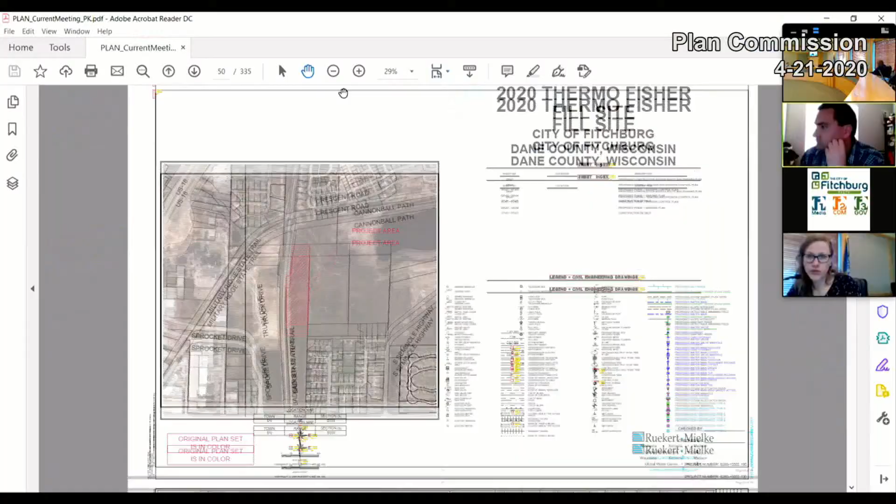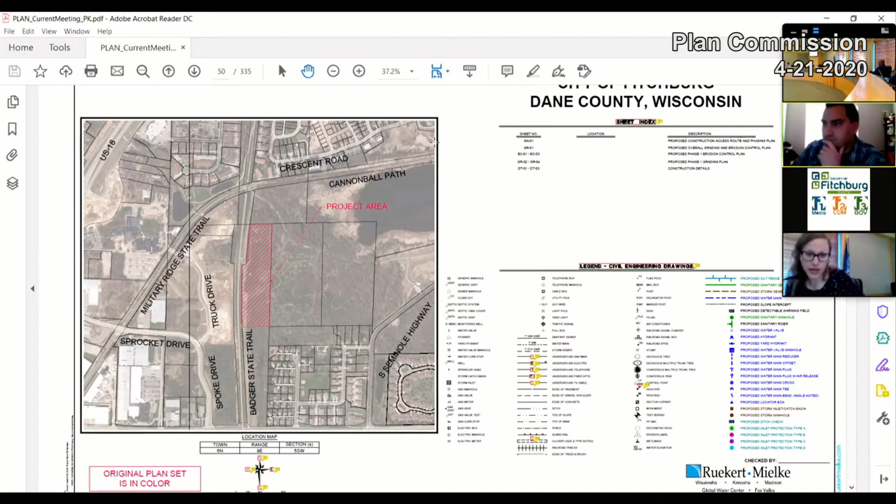All right, so this application is for an erosion control permit or a land disturbing activity. When the parcel is over 5 acres in size, this requires Plan Commission approval, so that's why it's before you tonight. The parcel is located north of McKee Road.

It's in between the Badger State Trail and the Dolly Park Conservancy area. Shown up here on the image, it's this long and narrow outlot that goes parallel here to the Badger State Trail. The parcel itself is about 18 acres in size, and the area of land disturbance is outlined in the red hatching on the northern portion of the parcel. That encompasses about 11 acres of the outlot.

To the south here, we have the Pine Ridge Subdivision, and over to the west are the rest of the Thermo Fisher land holdings, Spoke and Sprocket Drive, and again, the convergence of the bike paths in this area and the Pond and Dolly Park Conservancy over here to the east.

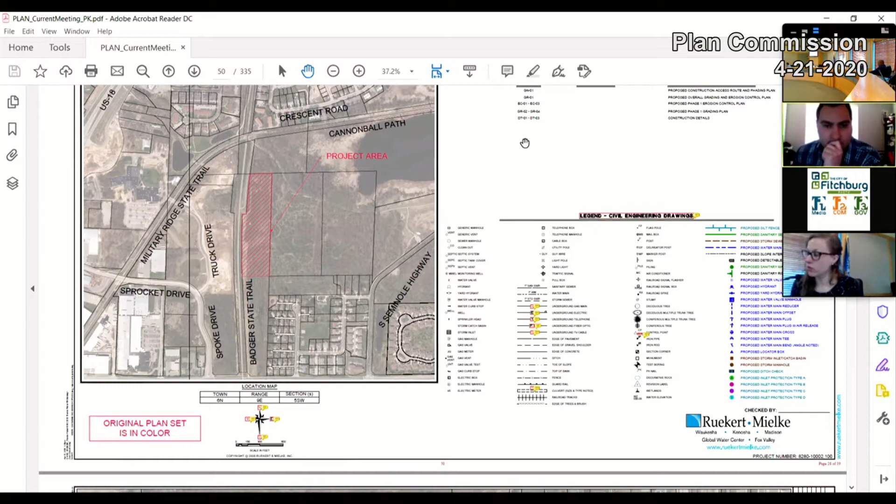A lot of neighborhood residents submitted some comments of concern that touched on different topics, so I just want to run through those quickly. They were about the topics of noise, traffic, aesthetics, and how the sort of stabilization and slopes and grades would look after the fill is complete, stormwater, hours of operation, overnight crushing, and things like that.

And before I go into all of those comments, I'll also show this phasing plan. In total, the fill to be brought into this site would amount to 100,000 cubic yards of fill. It would be coming from two different City of Fitchburg road construction projects: first, the McKee Road reconstruction, and then second, the Fish Hatchery Road reconstruction.

Phase 1 and 2 would happen on the farthest north end of the parcel, amounting to approximately 30 to 40,000 cubic yards for each phase. Phase 1 and 2 would come from the McKee Road project, and Phase 3 would come from the Fish Hatchery Road project.

Going through those issues: first, the hours of operation. The applicant stated no overnight work would be done, and work would be limited to standard city construction hours. In the staff recommendation for approval, we've limited that by saying construction may not occur outside of 7 a.m. to 6 p.m.

Second, because hours would not extend beyond 6 p.m., the applicant has stated that lighting would not be required. We've also limited the approval accordingly, with site lighting being prohibited on site.

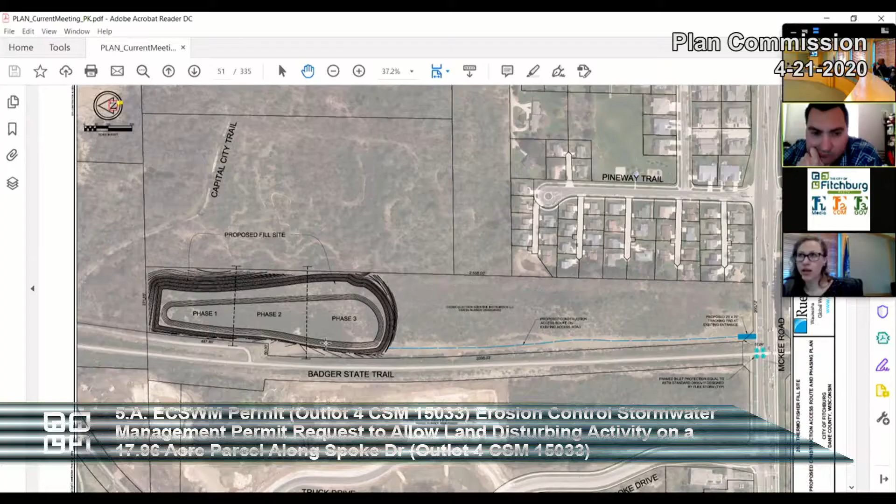Third, we provided review comments to the applicant regarding the impact on the bike path aesthetically. In their response, they explained that the first 40 feet east of the Badger State Trail would not be disturbed. After that, the grade would start to go up, forming an embankment of about 8 to 10 feet in height, not exceeding a slope of 3 to 1.

That area would be seeded with native prairie grass. Regarding compaction, we wanted to make sure the fill being brought in would be appropriate for future development. The application proposes an agreement with the landowner, Thermo Fisher, that the fill would be limited to soil, sand, and rock, precluding construction waste as well as hydric soils. Finally, regarding stormwater, there were a lot of resident concerns.

Public Works has reviewed this in detail and has recommended approval, and they've also consulted with other agencies, Dane County, as well as the City of Madison.

There were a couple of accommodations from the applicant made to address the stormwater concern. First, they added a lot of native prairie seeding. With deeper roots, it allows for greater infiltration, reducing concern about runoff due to the removal of the trees. Second, they added some temporary erosion control measures, including a basin.

I don't know exactly where it is here on the site, but if we have questions, maybe the applicant can get into that. It also reviewed specifically the drainage patterns.

Like the applicant stated, the existing pattern goes east to the park where it eventually discharges. In the proposed and final grading outcome, the flow would still continue to go to the east. In areas with the new western slope, it would drain to the west, but then meet a ditch where it would be conveyed around and still go to the east.

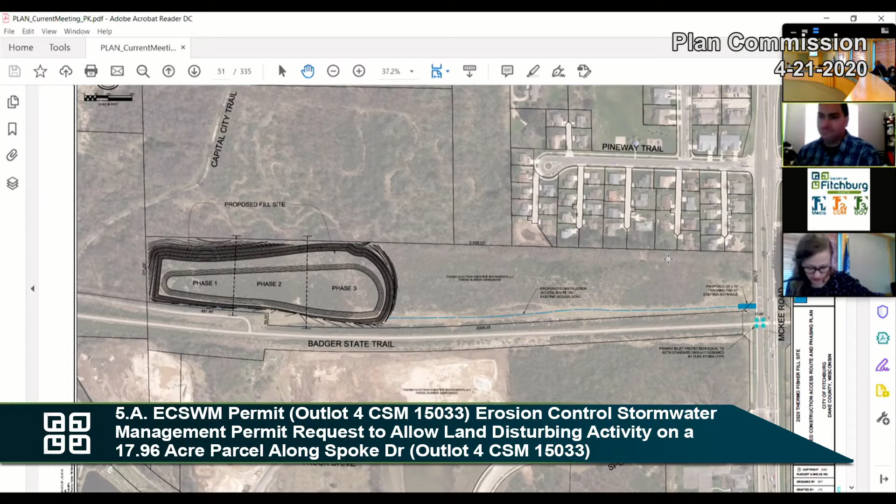All in all, the staff recommendation is for approval as listed in the staff report, and there are 7 recommended conditions that address the things we just went through.

In this area, we're also looking at the Capital City Trail and doing a study with both the City of Madison and the county as well to figure out what improvements can be done, because that area in general, nothing necessarily to do with this site, has a lot of water issues. So we're looking at ways to improve that already, and this, from what I hear, isn't going to make those things worse, but it's a bad situation.

I do have some comments from the public that I want to read before we get into discussion.

First up is from Dorothy Krause, who lives here in Fitchburg and is on the council. Dear Planning Commission members, looking over tonight's agenda, I am dismayed not to see better representation of the resident comments for your consideration. We did the Arrowhead redevelopment plan in 2012, with the largest portion being the Thermo Fisher property. The Pine Ridge neighborhood residents were heavily involved.

Knowing they would be concerned about this proposal, I asked for their thoughts when the comment form came to me. I didn't quite expect the deluge of comments that followed, more or less summed up in Matt's comments and email exchanges below. For myself, my greater concern is what happens with stormwater.

The mountain bike trails and the Capital City Trail already have stormwater issues, especially given that water from the site must cross them to get where it's going. Whatever happens, I'm hoping that the Plan Commission makes sure that guarantees are in place that will mitigate stormwater impacts for a number of years into the future as needed.

Also attached my comment sheet as well as cut and paste my comments from here. I have significant questions and concerns about stormwater impacts related to surrounding bicycle facilities in an area where there are already water issues. There is no way that this project can go forward without a stormwater study to answer many questions and concerns.

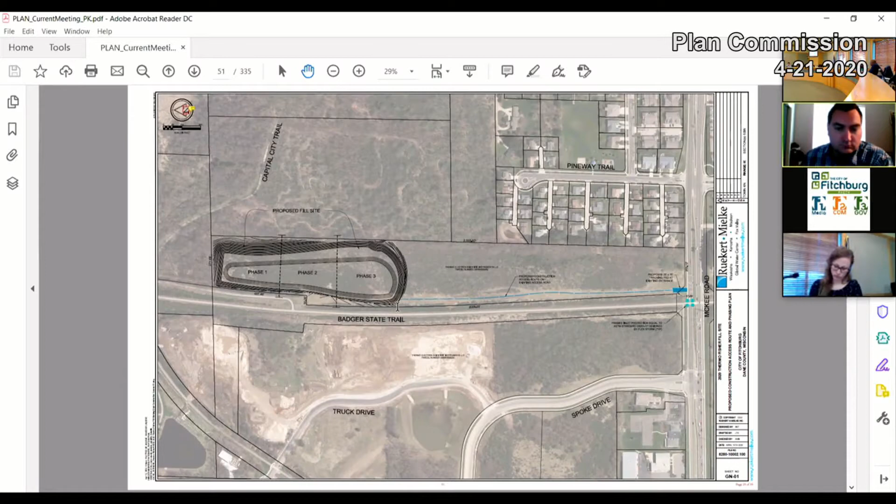I just want to make sure that the access road is coming off of McKee Road, so it'd be to the west of the Pine Ridge neighborhood, running parallel to the bike path. Is that your access point? Correct, that blue line right there is the access road back there.

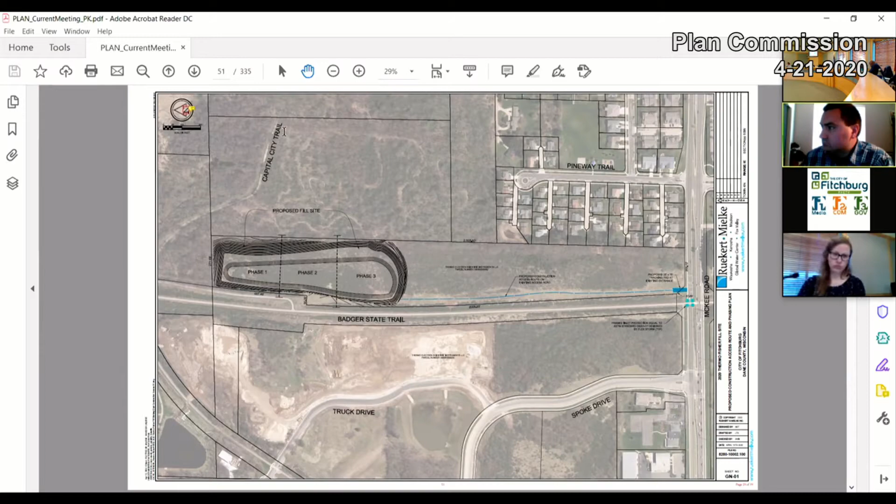And the tree line has already been cleared for that access? I believe it's been cleared at least about halfway back. I don't know if a little more clearing needs to occur, but the contractor will maintain the road and the erosion control measures as needed. And for transparency, I know they've actually started some work here with a 5-acre or less permit, because they wouldn't have to come here for that, and they need to get started.

So this is really asking for it to be, sounds like 7, not 11 acres now. Just on that point too, tree clearing did begin. So even without any fill being brought in, our public works staff noted that the tree clearing itself wouldn't require any permit or review, as long as there was no stump grubbing that would disturb the soil.

And from what I read, I believe they are doing better plantings than probably what's there right now, and agreed to do more deep-rooted plantings as well. So that's something that is going to be an improvement over what has been there. The trees we lose is unfortunate, but it's not just grass - there's some wildflowers and stuff like that too.

Do we end up just giving clearance for anything over 5, or do we actually specify up to 11? I'm curious, if we're not going to be using up to 11, should we amend this so it's appropriate for the future use? Generally, you could just make a motion stating approval is recommended as proposed. So if the proposed plans show 7 acres, then 11 acres would not be authorized unless they came back before the Plan Commission with revised plans.

Sounds like maybe you want to make a motion, Stephen. Oh yeah, Rich, I'm getting confused again, because it's a 17-acre parcel - I thought it said 11 acres of this part they were going to do, and we're actually only using 7 acres of it, is that right? Correct. Because 100,000 cubic yards is like 2.7 million cubic feet. That's a lot of dirt.

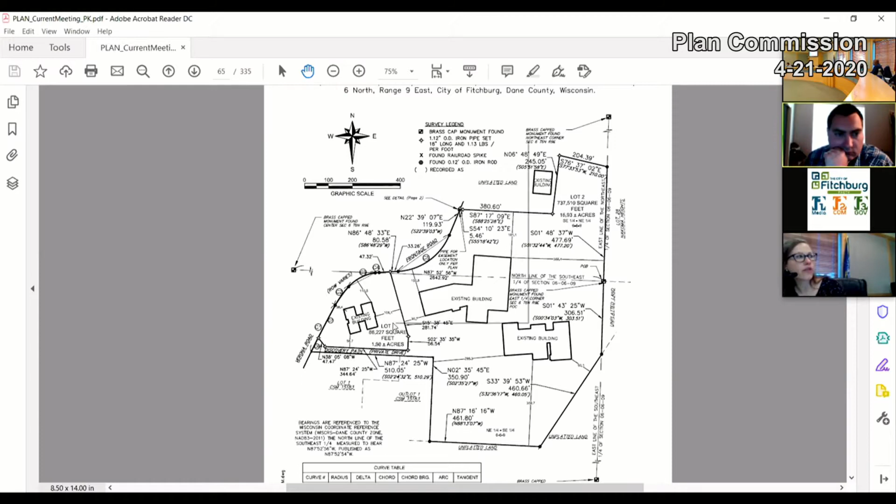The area is zoned industrial specialized. Staff identified no concerns with any of the dimensional requirements of the zoning district. Discovery Path is a private drive that provides access to Lot 1, so with the recording of this CSM, those cross-access and shared drive easements would be re-recorded. No concerns identified from Public Works staff or other departments. Staff recommendation is for approval as noted in the staff report with 7 conditions of approval.

Any questions at all? Comments? Or a motion? I'll move approval of Certified Survey Map CS 2346-20 with 7 conditions set by staff. Second. All right, all in favor, say aye. Aye. Any opposed, nay. All right, that one's approved.

Next up is conditional use permit for Park Bank. Is there someone here for Park? Are you Park Bank? Okay, do you want to come up and tell us what's going on here?

Material samples for, oh great, to go along with the architectural review for the project. Yeah, I mean, if you want to do everything right away, that's great.

My name is Brian Reed. I'm with Potter Lawson, one of the architectural team working with Park Bank on the project. Let me set these out for you. Sorry, Zach, you're not going to be able to see it very well.

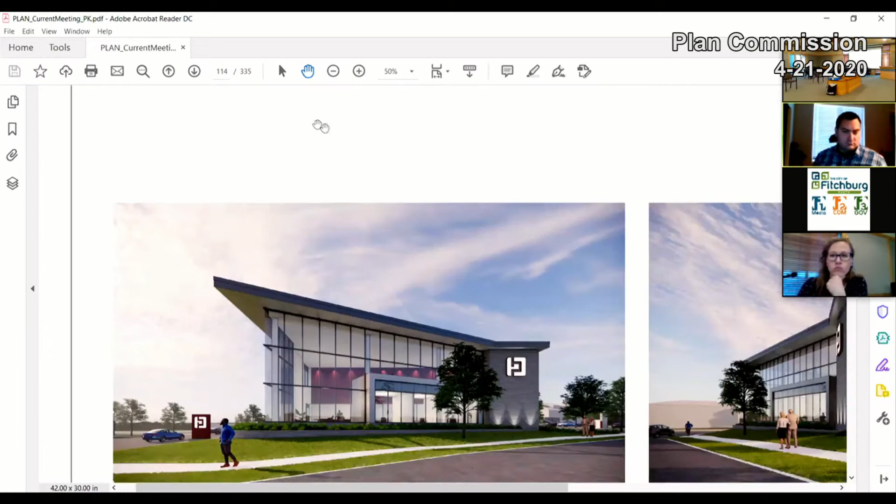The proposed exterior elevations consist of a palette of materials that are a mixture of stone masonry, curtain wall, and storefront.

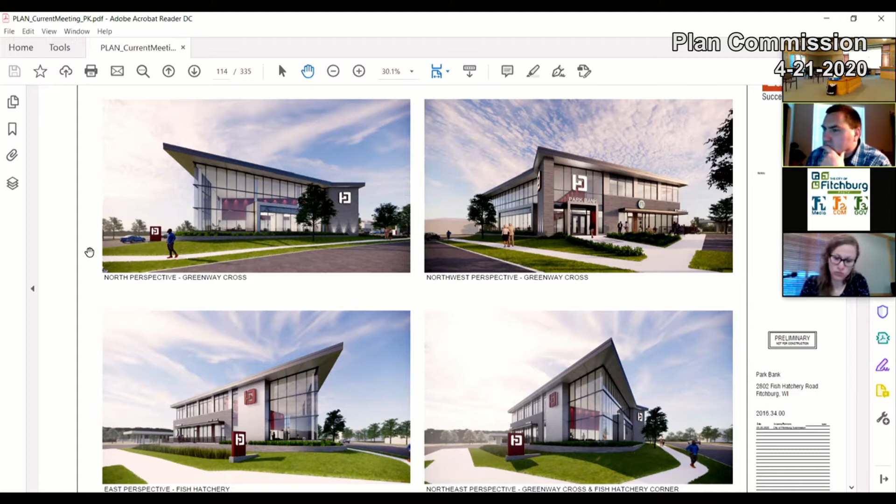The image in the upper left-hand corner, the view from Greenway Cross, demonstrates the concept for Park Bank to be a little bit more transparent and open up their ability to have more connection to the existing streets, as well as visual connectivity to the intersection, so visually they have more access out to the public, and the public also has more visual access into their facility.

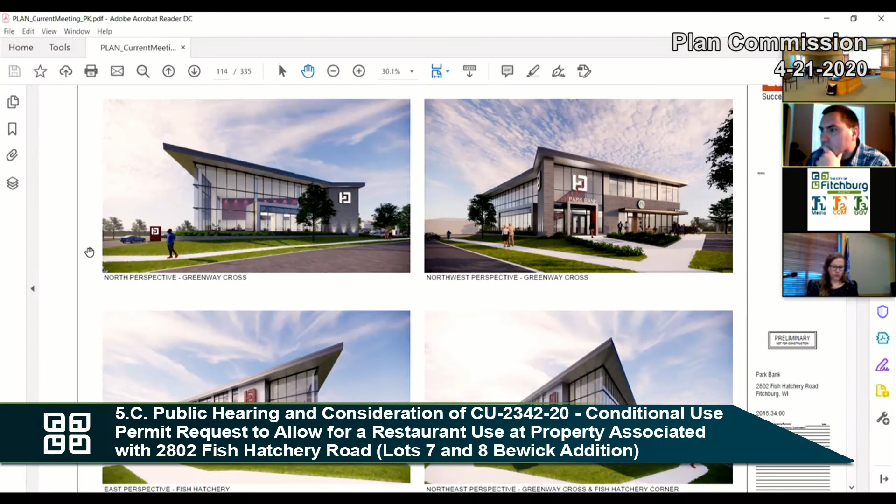Currently the existing building is set back quite a ways and has small windows, so it's hard to tell if any activity is going on there. That's one of the guiding concepts — they wanted to bring it out to make it more prominent for a better condition.

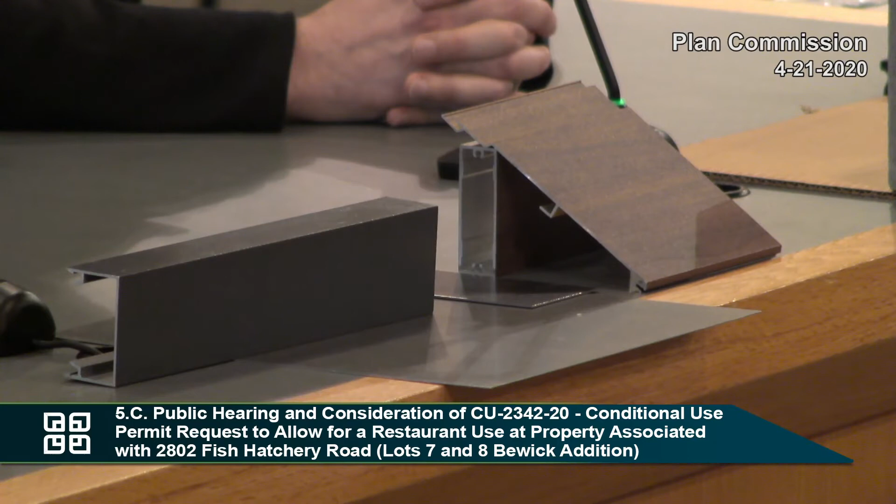Their area is clad primarily with a two-story curtain wall space, stone, and a metal panel, which would be stainless steel or potentially an anodized clear aluminum metal panel. There are accent areas at their entry points and at the ITM, the drive-through canopies, which would also have matching materials.

There would be a stainless steel panel on one side of those canopy structures, and then more of a painted red metal panel on the other side.

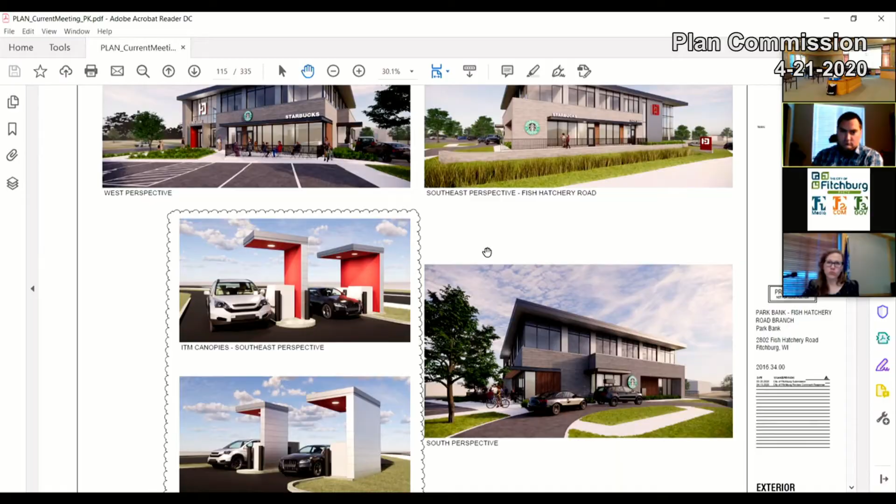There are also accent materials down along the retail area at the entry points to the proposed restaurant use, using an extruded aluminum siding material in a walnut finish to give the palette a little bit more warmth. This material would also be used in the soffits of those entry canopies. That's an overview of the project.

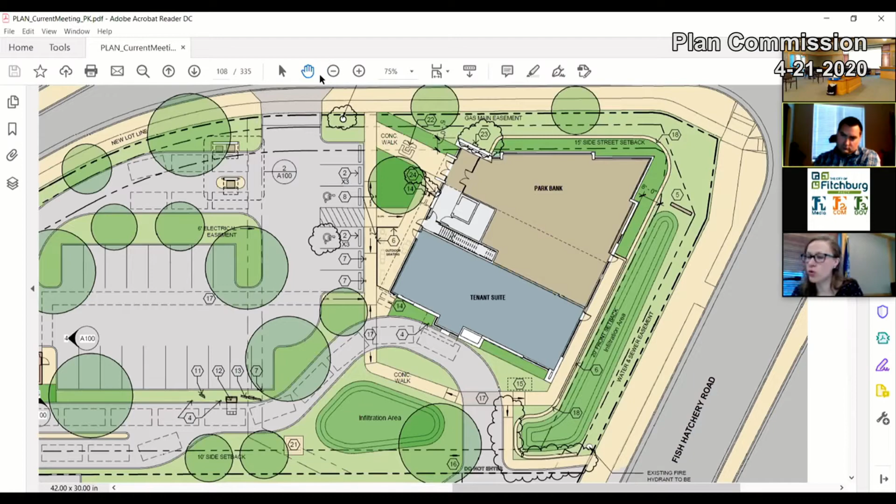The Plan Commission does not have authority to grant area variances like this. That needs to go to the Zoning Board of Appeals. The burden is on the applicant to make sure that they are meeting the criteria necessary to obtain a variance from the Zoning Board of Appeals. So they need to show that the property has a hardship or there are unique limitations.

In this case, one of the things identified by the applicant is that additional right-of-way was taken along Greenway Cross, reducing the size of the site overall, making it difficult to have all of these components for a normal redevelopment like this that otherwise meets all of our visioning plans and such. They also need to show that there's no harm to the public interest, so showing that these encroachments don't block vehicular traffic, et cetera. In any case, the staff recommendation is for approval conditioned on the applicant obtaining that variance from the Zoning Board of Appeals.

That meeting hasn't been scheduled yet due to the COVID issue. It will be scheduled soon with whatever technology and accommodations we need to do, but that's a condition.

I mentioned there were two. The second issue is the fact that this parcel currently exists as two separate lots, yet the site was designed as if it were one. They didn't identify the building setbacks in the middle of the lot, for example. So a certified survey map will be required to combine the two lots. The applicant's aware of this, and they've agreed, and we'll be submitting that, I think, for our next Plan Commission meeting.

Overall, the recommendation is for approval. There are 10 conditions noted. It includes the variance, it includes the certified survey map, and the rest of the recommended conditions are fairly standard.

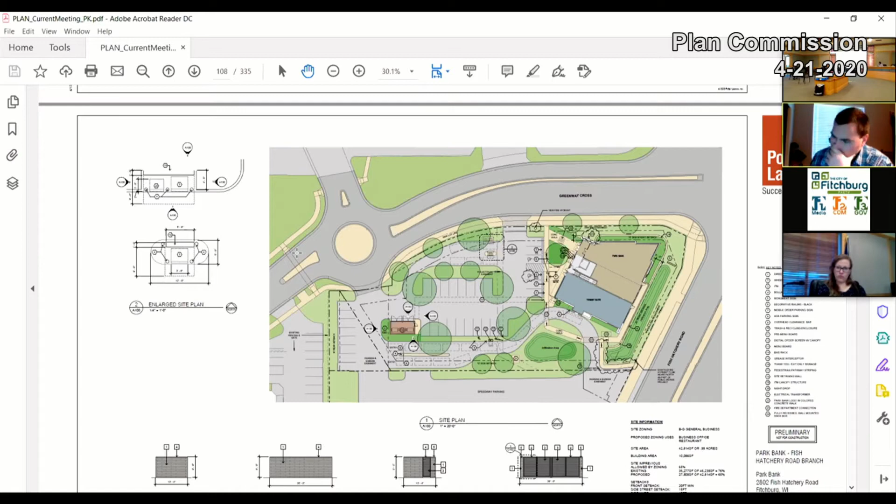Gotcha. I could see that being, I don't want to say a problem, but a bit of a thing. I think you guys will figure it out. Yeah, Tom.

My first comment is it's great, it's long overdue. You realize you're taking some history out of Fitchburg because we're losing the ice cream shop, you know that, don't you?

I have a couple questions, I don't see it here, and I think I know the answer, but there's not a connection between this building and the Speedway building, is there? There's no physical connection, no. No connection, no walkway or anything? No.

I know you probably brought this up, but I want to ask about it. It's such a cornerstone to Fitchburg, such an entrance to Fitchburg. Was there any discussion, maybe this can happen another time, about having at the street level a temperature sign, time of day, something like that? Not that I'm aware of. I'm not sure if any discussion has gone on with the Park Bank leadership or anything, but not to my knowledge. It's just a thought.

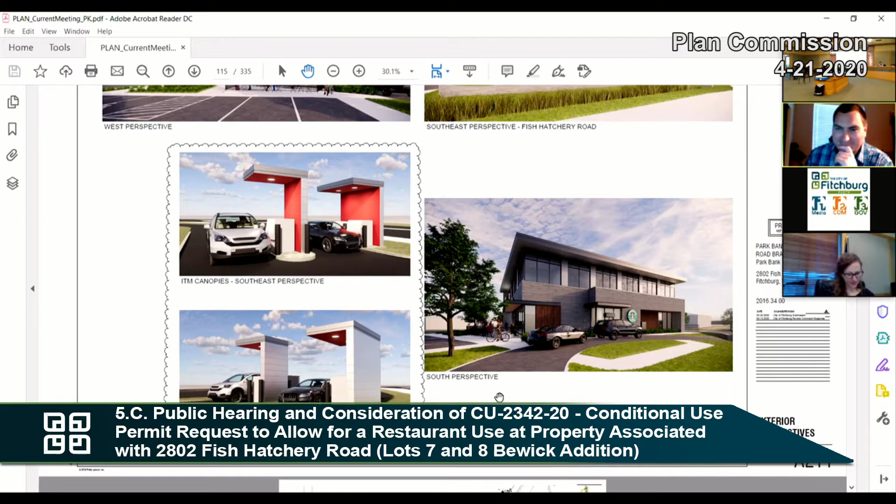Any other questions or comments? Are we talking just about conditional use, or are we also looking at design? We'll do the conditional use first, and then we can do design next.

I move to approve conditional use permit CU 2342-20 with no conditions. Second. All in favor, say aye. Aye. Any opposed, nay. All right, that's approved.

Now the ADR for the same project. Is there anything you want to add at all, Brian? I don't think so. Okay, any comments on design at all?

Steven? I've got something. Sonia did touch on this, and it was the first thing I noticed from your elevations as well - the back side of Starbucks is facing out to Fish Hatchery. It's back of house, probably gonna be a white wall with glass put in front of it and an entryway, and that has me a little concerned. We've talked about that further down on Fish Hatch, not having actual doorways. I do appreciate that at least there's a doorway there, but that also concerned me. The bank has this amazing presence on both sides of the building, and then Starbucks, you're looking at back of house Fish Hatch. I don't know if anyone else has any concerns with that.

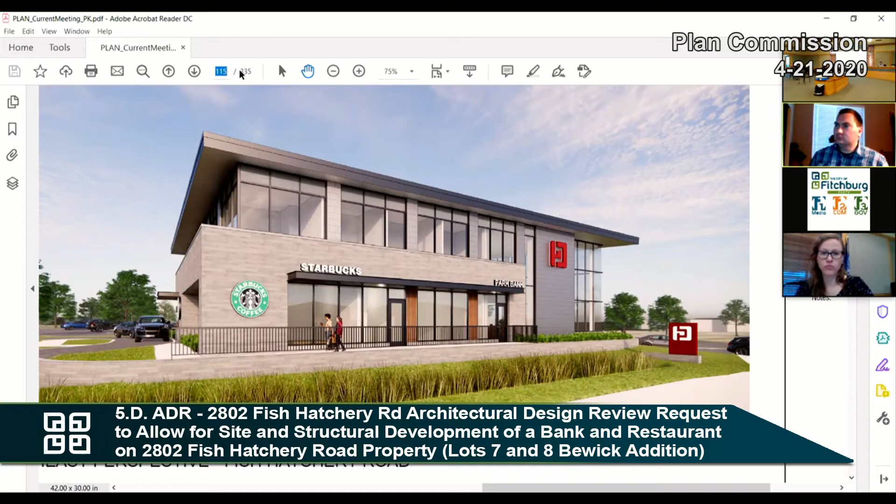I see your point, I just don't know. It's basically a triangle. You want the prominent part of the triangle to be Greenway Cross and Fish Hatch. You can't give Starbucks the prominent part of the triangle, so they get one of two sides.

No, but I'm saying the business side of Starbucks is facing Speedway and Greenway Cross. I see exactly what you're saying, but with the drive-through and that little sidewalk, I don't know what else. And we already talked about the egress and ingress from Speedway. I just don't know what else could be done to design it better, I would be a designer. I'm here to be a politician and complain when I get to complain.

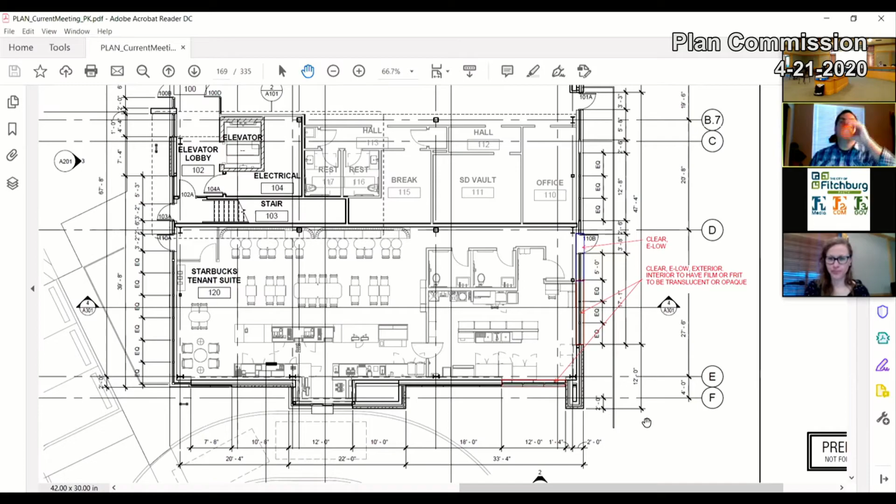So here I am, we're not offering that politically. No, I get it. I totally get it - I don't know if there's anything that can be done, but I do see that as a concern.

Sonia, can you show the site plan again? I just wondered if there could be a more direct sidewalk access more toward the corner, because from that bus stop, you have to walk kind of all the way around. There's no direct route.

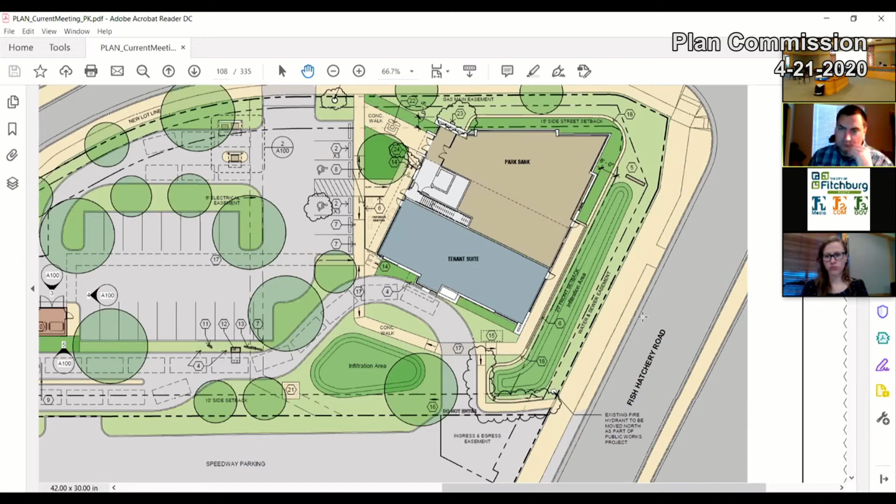Correct, there is a change of elevation, so a direct route would potentially be a challenge. Right now the first floor of the building sits about 3 feet above the sidewalk along Fish Hatchery. So as you come around the corner heading up Greenway Cross, or come into the site heading the other way, you're traversing that grade. A direct connection would require a ramp. The site was designed to take into account the existing topography, because it drains from west to east, which is why we placed the stormwater retention areas along the eastern edge. That would also be a challenge in reducing that footprint, and there are requirements for infiltration - that's kind of where we wedged it in, where there was room.

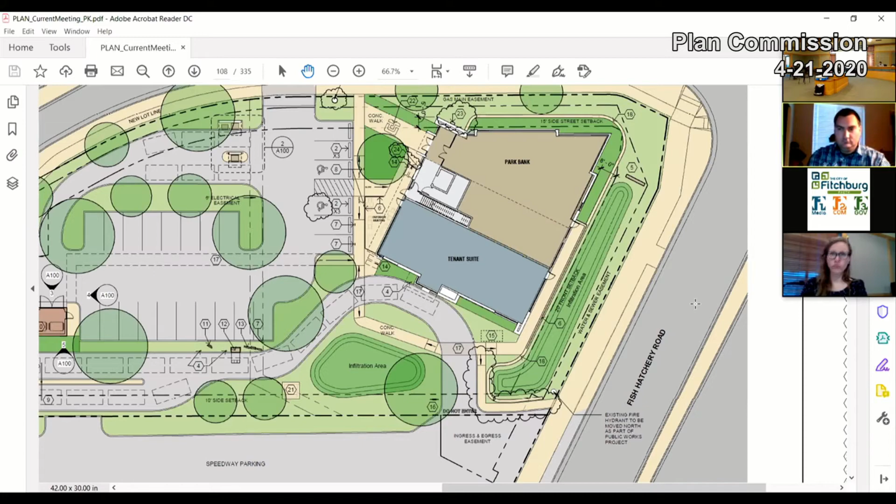Any other concerns or comments? I think with redevelopment, it's always a little more of a challenge because there's a lot of unique things associated with it.

Seeing nothing else, does someone want to do a motion? Make a motion to approve architectural design review for 2802 Fish Hatchery Road. I'll second. All in favor, say aye. Aye. Opposed, nay. That's approved. Thank you.

Next is Hospice. I don't think anyone's here for that one either. Do you want to speak to this, Sonia? I know we've talked about this once before.

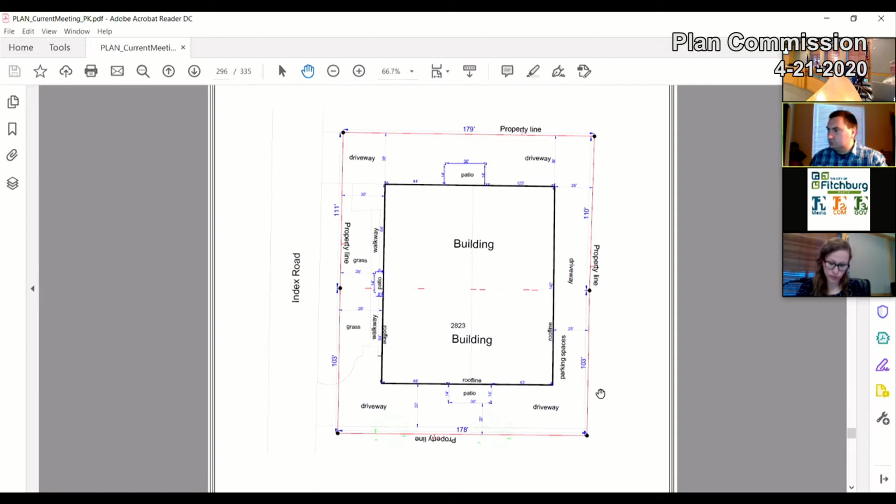Ed: Where's the parking for this? Looks like parking is behind the building. That's going to be pretty limited for an educational use. How are they going to manage it? I think it's the same building my daughter had music lessons in - there was never any parking, you'd just go in, pick up the kids and drop them off. It's hard for me to imagine how they would operate. The teachers have to have a place to park, and parents that are picking up or dropping off kids, or any kids that are driving. There's some street parking, but there's usually a number of cars out there as it is. So I'm just wondering how they expect to manage this.

In the staff memo, there's an aerial image of the site, and the property behind this one is owned by the same property owner as well as the building to the north. I can't speak to any details, whether there are any shared parking arrangements for those uses, but at least point out that other parking lots exist in the area, though I'm not speaking to any arrangements.

I got a question. Is signage considered exterior building improvements or anything? That would go through the normal process to get a sign permit approved from city staff. So that's administrative, outside of this approval.

Other questions or comments? Hopefully it's successful. I jumped on a Zoom call yesterday that they had for the community. There really wasn't anyone else, I think they had one person. Friday they did one too that I logged on, but no concerns at this point. I know they're excited about this site because it's close to some areas they're going to try and draw kids out of, to give them a better chance for success.

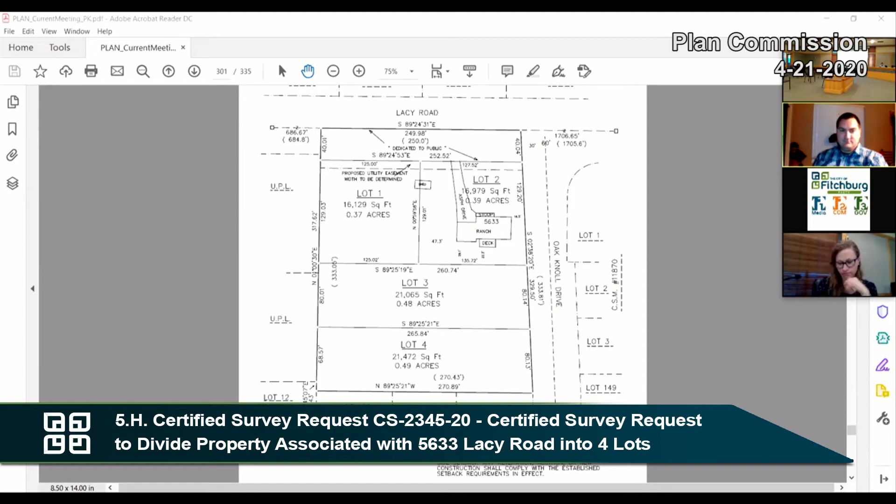Steven, I guess I do have to kind of question similar to the applicant. So we would have the sidewalk going up Oak Knoll for two properties and then just end, and then you've got four, five, six properties before you get to Richardson. So it's just a sidewalk around the corner and ending. If we do it other places, even up here next to City Hall, it goes to city property and then it kind of stops.

I think at one point they thought it would go down Lacy, and it didn't over here on this part, but I see it. I can see connecting to the sidewalk going to Lacy. I'd have to remove about five huge pine trees. It can be done, but I can see that, putting sidewalk in on Lacy.

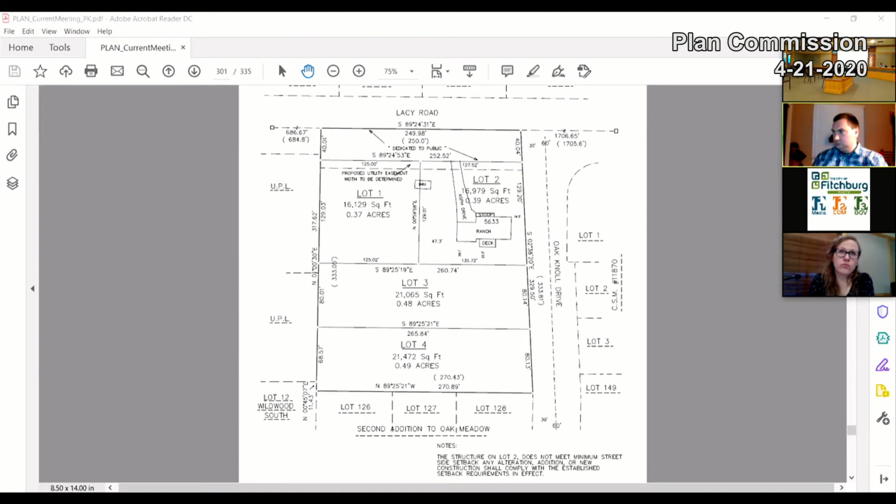That's gonna, I mean, I guess, is there any time frame to get the rest of it done? It could be 5 years, 10 years, 20 years. You don't want people crossing on Lacy Road, so you really don't want them using the sidewalk. So that's kind of my thought process behind all that. I think that's the challenge: nobody here would spend the money to put sidewalk in if it's not connecting to anything. I know it's a requirement, and that's what Public Works wants, but nobody here would ever spend that kind of money to do it.

And again, that elevation is like 5 feet high, so you gotta put in a rock wall, and I don't know what kind of requirements Public Works has on that. When I was driving around today looking for other sidewalks that had a rock wall, the first one I found was on Fitchburg down here. It's all rock retaining wall past the old bank or whatever, on the corner. I don't know, it wasn't too pretty. I don't think you want that kind of rock wall there. If anything, you'd probably want something a little more decorative, stacked a little bit nicer.

And I just think that if you're gonna put sidewalk in — because none of those houses on Lacy Road are being torn down, nobody's rebuilding there, nothing's gonna happen with those — I think the only way you're gonna get sidewalk in on Lacy Road is you assess people proportionally and just get it done. And I think that would be the time to put that in. It would make the most sense to me, I think. That's just my thought. Ed?

I agree with Jason on this, and I'm wondering if there's a way to get this done. Would it be possible to place a deed restriction on lots 1 and 2 that the owners of those properties waive any right to contest assessment for sidewalk installation in the future?

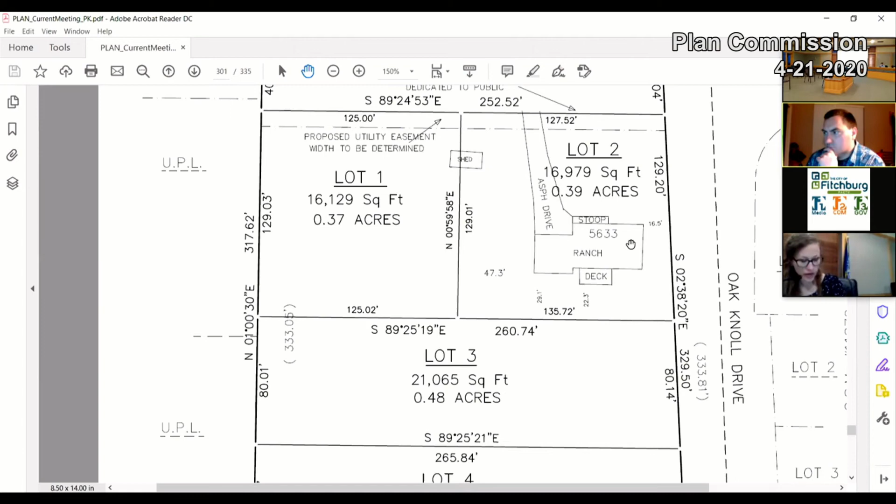Sure, okay. So if the Plan Commission wants to make that modification, I would suggest changing condition number 6. Want to give us some wording for that, Sonia? Sure.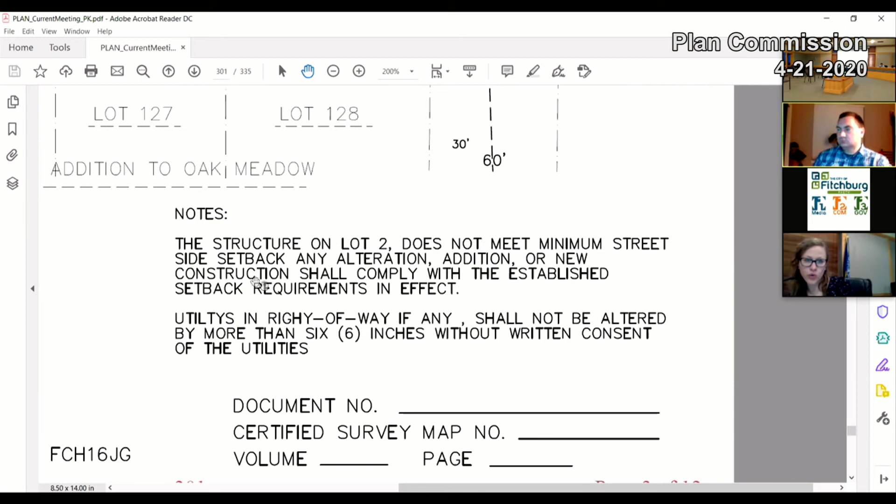Let me see here. I think there is a note here that reads already on the proposed CSM: the structure on Lot 2 does not meet minimum street side setback. Any alteration, addition, or new construction shall comply with the established setback requirements in effect. So we could modify that note to read: the structure on Lot 2 does not meet required RL zoning setbacks. Any alteration, addition, or new construction shall comply with the established setback requirements in effect, eliminating the specificity about minimum street side setback.

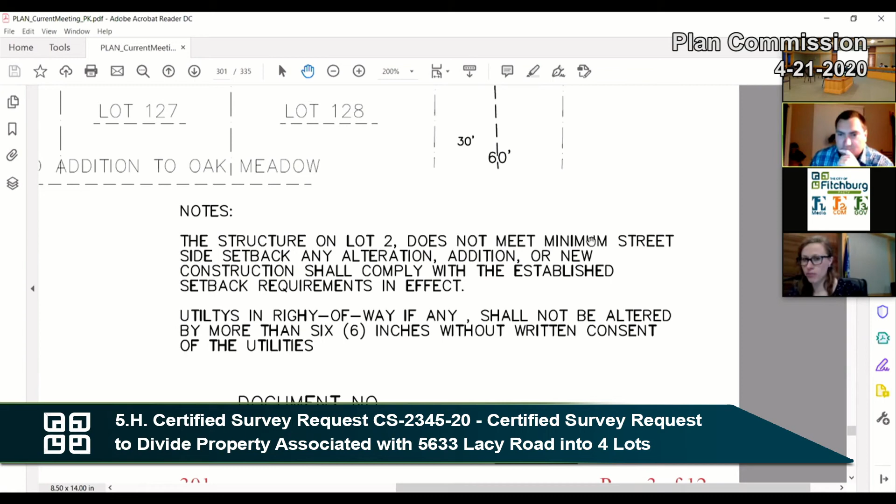Anything else, or does someone want to do a motion with those two edits? Sure, I'll move approval of CSM 2345-20 with the 14 conditions, condition number 6 modified per Sonia's recommended wording, and number 14 to eliminate the second sentence. Second. All right, seconded by Tom.

All right, seeing no other questions or comments, we can go to a vote. All in favor, say aye. Aye. Aye. And opposed, nay. All right, that's approved. Thank you.

All right, moving along. Looks like there's no one here for that. Do you want to speak to this, Sonia? Sure. Once again, I will just bring up the site plan here.

This is a final plat amendment in the Terravessa plat, regarding one specific block along Frisee Drive. This is a final plat amendment that is essentially a lot line adjustment between 8 lots. There are already 8 existing lots on the final plat, so it's not creating or subtracting any lots.

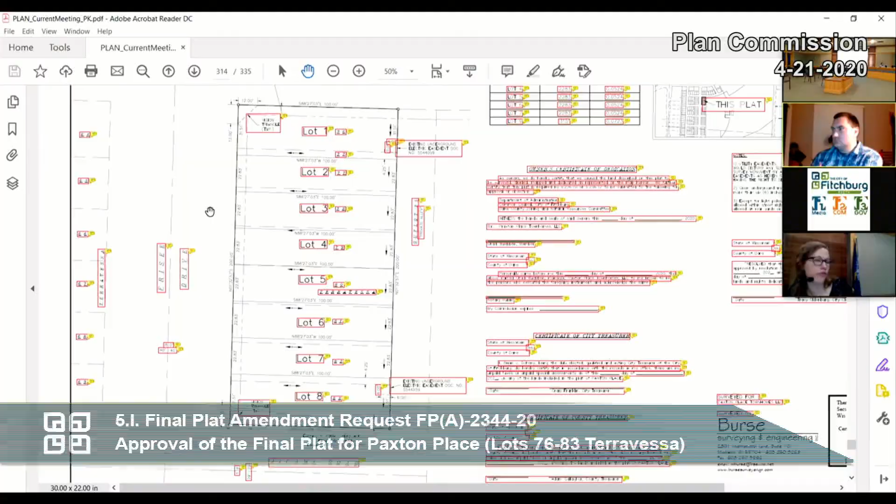Aren't these two homes where the garage is in the rear? Yes, this would be alley loaded. On Frisee it would be front of the house, and on the east side would be alley loaded. Is that the term you use? When it comes to maintaining those, I know there's something similar over on Sain Road. When it comes to maintaining those roads, whose responsibility is that? Those are private alleys, subject to private maintenance agreements. It's totally private.

Anything else? Oh yeah, Tim, got me thinking on your comment. Do we know the price range of these homes? No, I don't. No, that's for another day. Depends on what the pandemic does to the prices. I'm picturing this, actually my first home in Fitchburg was at Hatchery Hill townhouses, this is what I'm picturing, similar kind of, 2-3 story probably, garages underneath on the backside. Yeah, I'm not sure, but for the cost, I can tell you those have gone up about 50% in the last 6 years since I sold it. Who knows what it costs now. Should have rented it out for a few years. I should have. Not talking about financial advice here.

Any last comments at all? The other advantage to these is you don't need a condo association with a zero lot line. You each have your own piece of real estate, though you're still going to have some sort of association to maintain the exteriors, obviously. Right, but you don't have to do the condo association route, which is good too. It makes these easier to finance as well. Yeah, a maintenance agreement is much simpler than a full association to deal with.

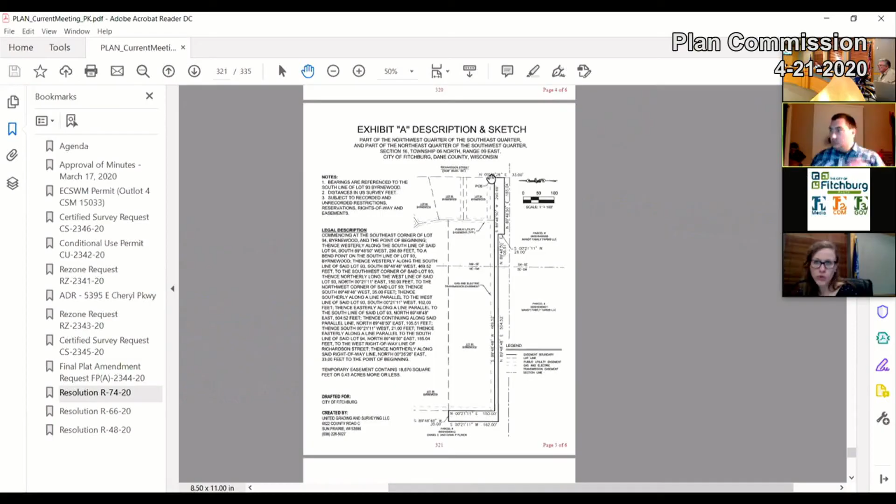Wish I could figure out how to get the aerial map up to show more context. This would be west of Fish Hatchery Road, South Fish Hatchery Road, in the Byrnewood subdivision, across from the parcels where J.T. Klein was proposing the multifamily project. Burn Park is down in this area. In order to access the retrofit project, this area identified in the thicker bold line would need to be granted to allow for construction staging.

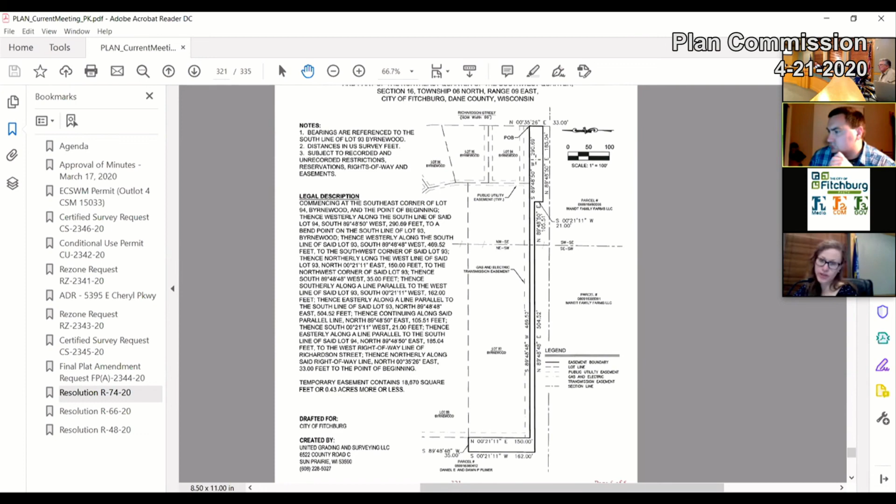So the property owner is agreeing to allow the city to have that temporary easement for access and construction, and approval is recommended. Sounds like a good thing, and nice of them to give us that access. Questions at all?

Move approval of resolution R-74-20. Second. Second by Lane. All in favor, say aye. Aye. Aye. And opposed, nay. All right, that is approved.

Okay, what's this one? The next item is Resolution R-66-20. This would approve the 4th Amendment to the Subdivision Improvement Agreement in the Plat of Nine Springs. This is specifically regarding the 10-foot recreational trail that had been required of the subdivider, which is Avante, to be installed within 60 months of the first recording, or 5 years of the First Amendment. That would have brought them to spring 2020.

The subdivider has requested an extension of about half a year, up to September 15th, 2020, rather than spring, to construct that path. The reason for this is so that they construct the path at the same time between East Cheryl Parkway and the new Central Park Place extension. Public Works staff notes that they're agreeable to this, as it would be more equitable for the subdivider and more efficient for all to complete the projects together.

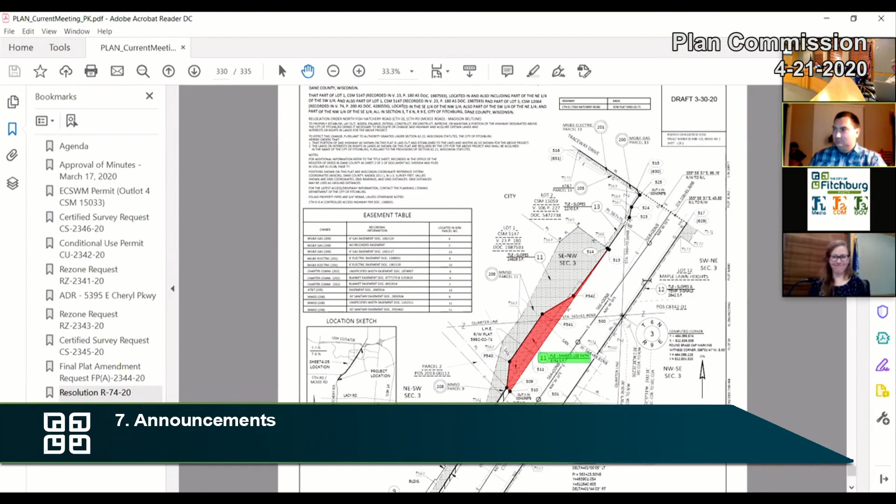Thank you. And next meeting, I don't know if we'll still be under this coronavirus cloud that we are in, but you're always welcome to be online like Zach is. Don't feel like you have to be here, but feel free to. I don't have any announcements, so if someone wants to make a motion to adjourn, we can do that.